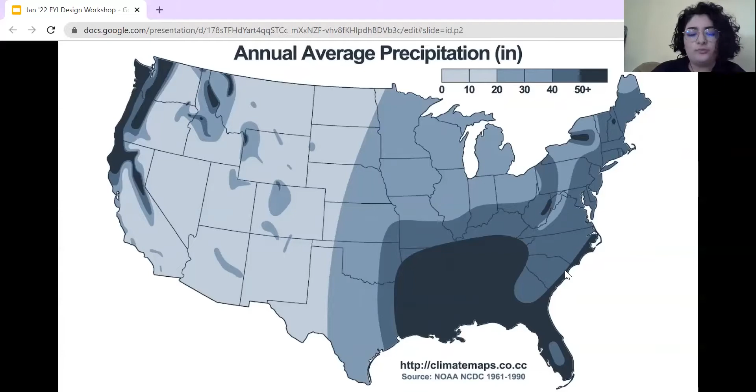So despite having a heavy yearly rainfall, we don't actually have that many more rainy days than the country's average. And that's because when it rains here, it pours. This quick deluge of water can and does quickly overwhelm our drainage system. It's the difference between dumping a whole bucket of water down the drain and trickling in a cup at a time.

Most of New Orleans used to actually be above sea level. That's because early New Orleans was only situated on the higher land near the river, created from seasonal flooding, which deposited sediment and created new land. As technology advanced, people were able to pump out water and make what was once marshland suitable for permanent structures. This has several unfortunate consequences, one being an increase in subsidence.

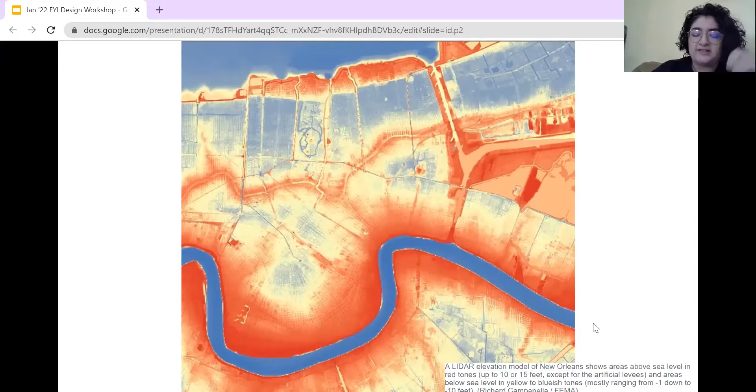So subsidence is just a word that means the sinking of land. Many of you are probably overly familiar with this concept. Subsidence leads to foundation shifting, sinking for homes, potholes that appear overnight, and yes, more flooding. New Orleans is particularly susceptible to subsidence due to the high levels of what we call shrink swell soils, such as clay. So when these soils dry out, they become like a desiccated sponge, and they can't be revived to their original volume.

The excessive amount of impermeable surfaces is creating more runoff, and that's runoff that our drainage system just can't handle. The Sewerage and Water Board's website says that an intense rainstorm that drops more than an inch of water in an hour will most likely outpace the system's capability. But we all know that a rainstorm that only drops an inch of rain in an hour is not very intense or very uncommon in New Orleans. Despite this, we have an excessive amount of impermeable surfaces that are creating 36 times more runoff than green spaces.

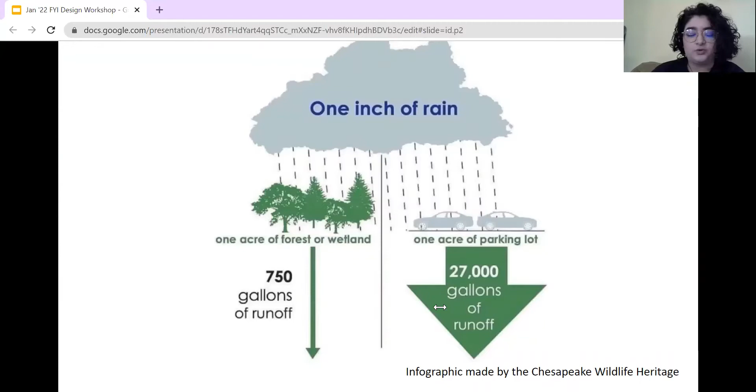Finally, we are overly reliant on that inadequate and antiquated gray infrastructure. Gray infrastructure refers to any traditional form of water management. These are things such as levees, floodgates, and pumping systems or basins. At the city level, we've heavily relied on a single approach to water management. Every drop that falls must be pumped out.

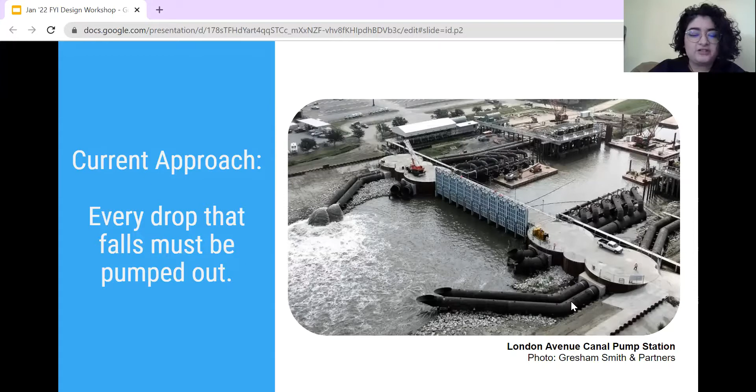This approach is not only resource intensive, but is also a leading cause of subsidence in our region. So we end up at an even lower elevation than where we started. And now we have these great big concrete walls, yes, preventing seasonal flooding, but also preventing new soil being introduced to our quickly depleting lands.

There's actually no equivalent to this map for drainage pipes, which is in itself a problem. But anecdotally, we do know that all the city's drainage pipes leave a lot to be desired. Pipes meant to convey runoff away from streets and homes are so degraded that they are often described as Swiss cheese when they're taken out, and so clogged that we're finding cars in them.

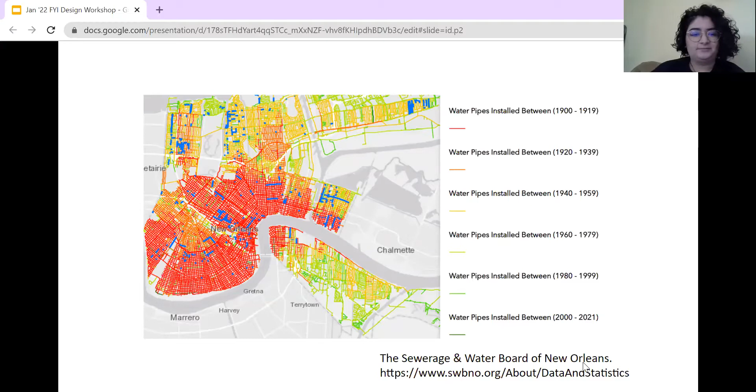So, as we've discussed, excessive impermeable surfaces can cause flooding and standing water issues. But are there other issues with concrete? Well, it's also ugly for one. Yards can be turned into parking lots. It's unsafe. Sidewalks end up getting blocked by cars, causing accessibility issues and forcing pedestrians into the street.

It's expensive. It creates more runoff, which your tax dollars have to pay to be pumped out. It's actually also a huge CO2 emitter. Cement contributes around 8% of the world's annual carbon emissions. And finally, it's illegal. The city defines excessive paving in the Comprehensive Zoning Ordinance, or the CZO, in most neighborhoods as over 40% of the front yard being covered in an impermeable surface.

And if you do pave illegally, the city of New Orleans might cite your property, meaning that there are consequences. You'll probably have to remove all that paving that you just paid to have laid down, and the city is not going to help you pay to do this. While far from an ideal situation, the city is beginning to recognize that paving removal is essential to New Orleans' resilience and is taking strides to require water management improvements on residential properties.

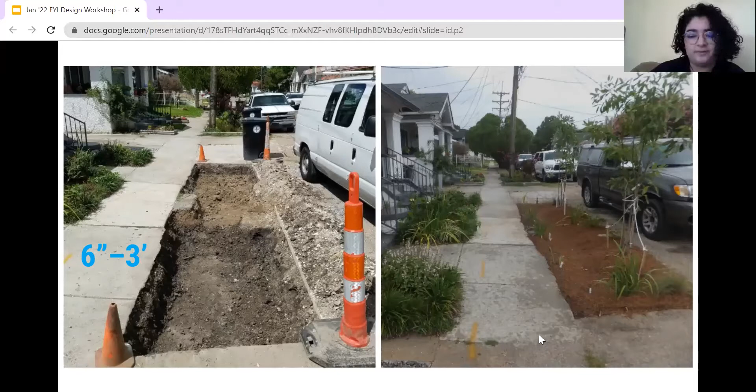When you fill the garden bed, you want to use a well-draining soil to encourage runoff to infiltrate. We recommend a mix of 80 to 90% sand, 10 to 20% topsoil, and 3 to 5% organic matter or compost. There are some local shops that sell rain garden soil-specific mixes, such as Schmelly's. Sand is made of large particles that create void space for water to seep into. The mostly clay soil that is super prevalent in New Orleans, on the other hand, is often so compacted that it can almost be as impermeable as concrete. It also isn't healthy enough to sustain the new environment you are trying to create.

The public right-of-way is the space between the sidewalk and the street. It is the city's property, but you can actually remove excess paving and install green infrastructure or a colorful garden like this one. It's a great example of how even tiny spaces can be transformed to greatly enhance your outdoor spaces and manage stormwater. Green infrastructure isn't just about stormwater management, but creating a more aesthetic, healthy environment for everyone to live in.

And just something to mention right here, because a lot of people do end up working in their right-of-way, is that as far as we are aware, you do not need a permit to work in your right-of-way. You do need a permit if you plan to do any work on your sidewalk, your driveway apron, or any curb cuts. Always talk to your contractor about whether or not they plan to get the correct permits, or if they expect you to get the correct permits. Because ultimately, you are responsible for getting the correct permits for your project. We are available to help with any questions with that.

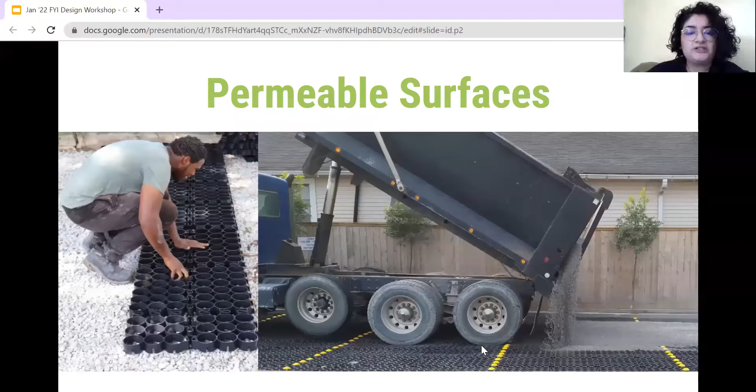Permeable surfaces can include permeable driveways, pathways, patios, or infiltration trenches, otherwise known as French drains. This creates storage space for stormwater to go and maintains a stable area suitable for light vehicular and pedestrian traffic. The pictured driveway can hold over 2,000 gallons of stormwater. This homeowner's first floor used to flood during a typical rain event, but now, even after 5 inches of rain, they are left with no standing water.

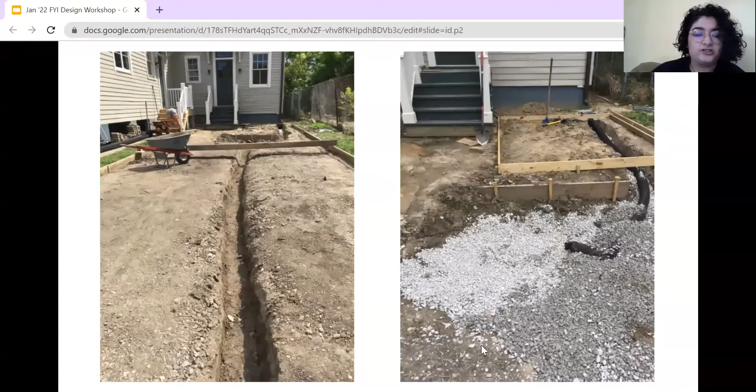Remember, most of what makes green infrastructure effective is what's going on beneath the surface. As you can see here, an area has been excavated with the middle dug even deeper for a perforated pipe to be placed. This creates more storage space for runoff and controls the conveyance of that runoff. The pipe is then covered with number 57 washed gravel, which is a very popular choice of aggregate, and this creates void space for water to be stored.

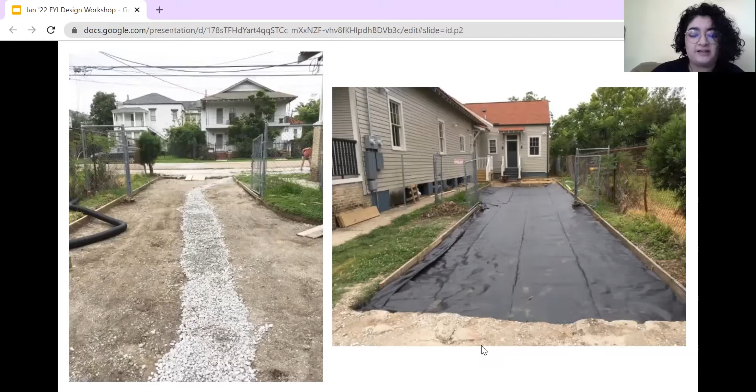Then the whole area is covered with a non-woven permeable filter fabric. This prevents debris from clogging the void space in order to maintain the installation's permeability over time. The finished product is a permeable driveway and a rain garden that holds an estimated 4,000 gallons of stormwater. You can even have permeable pathways within a garden. The gravel paths link water storage throughout. This is a good example of a mix of materials working together for compounding effects.

Okay, let's see if it plays. Dana, can you shake your head if it's playing? Awesome.

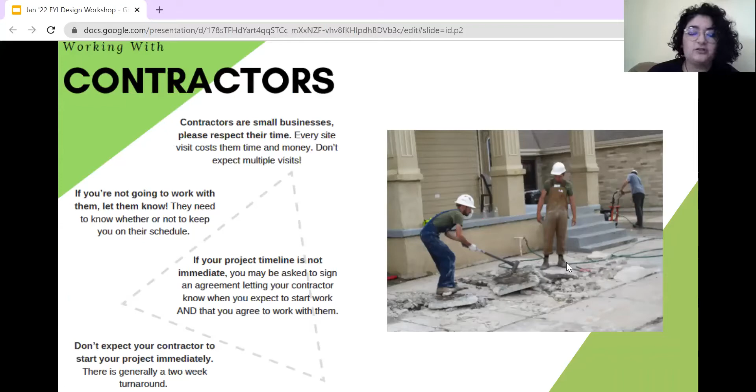You'll be working with very small local businesses most likely, so please be respectful of the contractor's time. Don't expect them to come out to your property more than once before you finalize a contract, and please understand that they have a lot of ongoing projects. A lot of supply chain issues from COVID and from Ida are still affecting a lot of these local small businesses, so please be patient with them. Let them know if you choose another contractor or if your timeline changes.

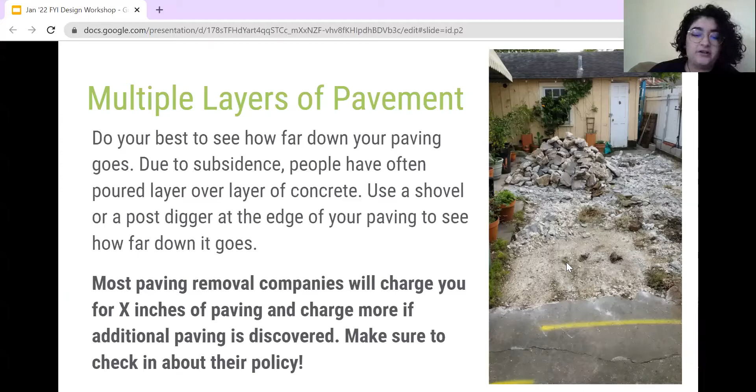So since concrete can be layered, do your best to see how far down your paving goes. Use a shovel or post digger at the edge of a paved area to see how far down it goes. Most paving removal companies will charge you for X inches of paving and charge more if additional paving is discovered. Make sure to check in about their policy.

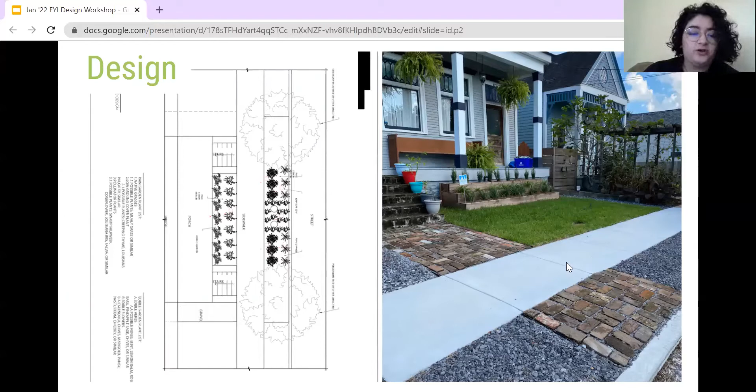So now we are going to review the next steps of the FYI process, design submissions. We're going to go over different features of designs that make them not only more competitive for the FYI program, but also more effective in combating flooding and standing water issues. In your workshop reminder email, you should have received graph paper to get you started on your design. As we'll see, there are many different ways to create your design that don't require graph paper. We do not expect professional grade design submissions. You can definitely do this.

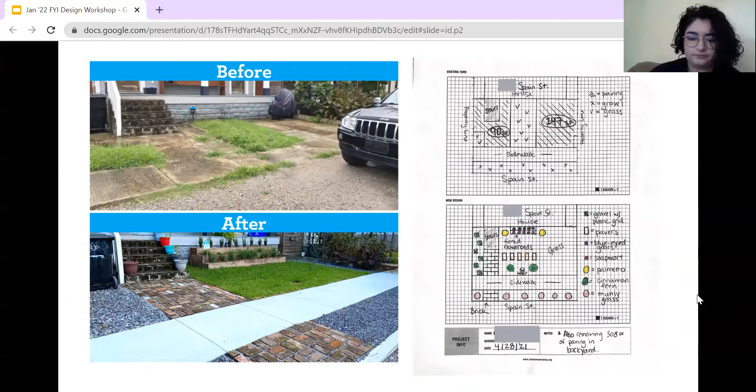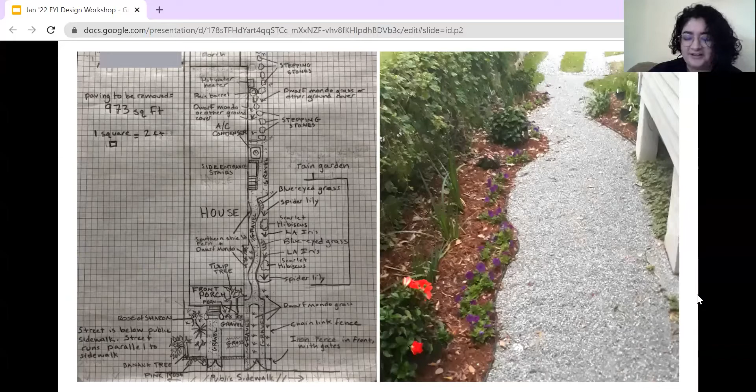This homeowner wasn't really big on drawing, so they instead just used labels. They labeled the sidewalk, fence, driveway, stairs, house porch, and the materials present in the right-of-way. We could not approve this design outright because it does not specify the types of plants to be used.

It's okay to be uncertain of the exact plants you plan to use, and we expect some small aspects of your design to change as you move on to the installation process. But specifying some plants in your design lets us know that you have given serious consideration to your project and expect to use a majority native plants. This homeowner was ultimately approved after informing us she planned to hire a local native plant specialist to landscape her yard.

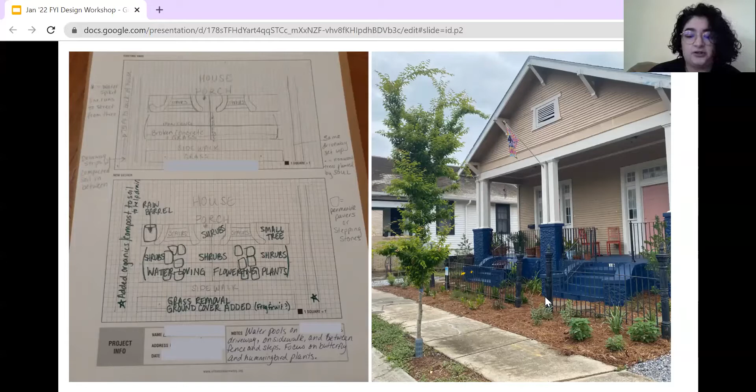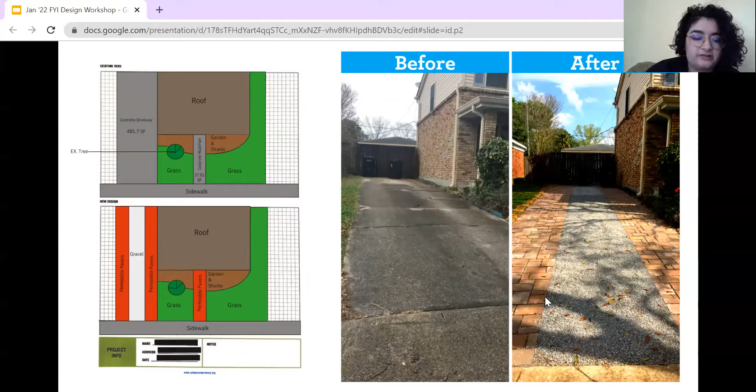So this is a good example of design that was ultimately accepted, but also required clarification from the homeowner. Since the design relies heavily on a permeable surface and there are no plans for other forms of green infrastructure, such as rain barrels or native plants, we asked the homeowner to specify the depth of the driveway. They planned for a 7-inch depth, which is great. We usually only recommend a 4 to 6-inch depth. If your design is going to heavily focus on only one type of green infrastructure, such as a permeable driveway, be sure to include details such as depth and materials.

So feel free to get creative with it and do what works for you. We receive designs that vary greatly in complexity and artistic skill. This is not what we are judging your design on. As long as we understand your vision and it aligns with our goals: visibility, inspiration, on-site water capture, and pavement removal, then you have a competitive design.

Remember, designs will be due in 2 weeks on Monday, February 7th, and you will hear back from us the following Monday, February 14th. You will receive an email this Monday inviting you to submit your design and with other details. Now let's take a look at some past FYI projects to get y'all inspired and revved up to make your own green designs.

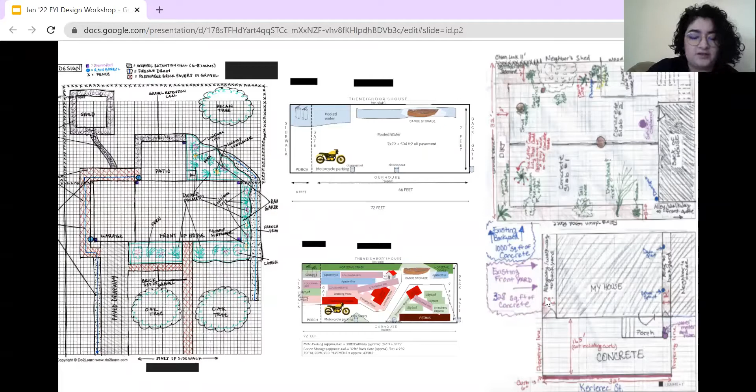These homeowners replaced their concrete with permeable surfaces and raised garden beds, and lots of native plants.

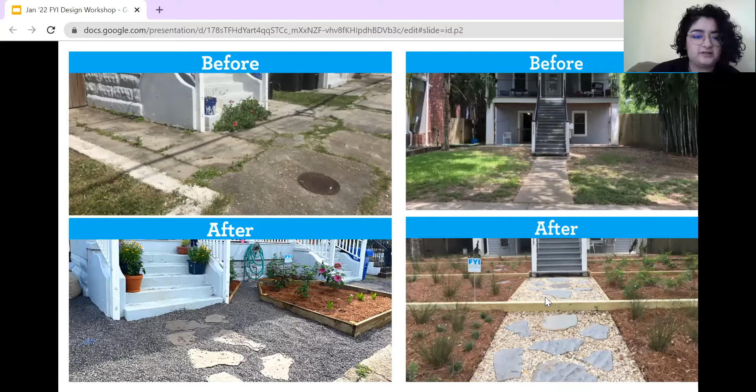When measuring out your concrete, you do not have to include your sidewalk if you plan to leave it alone. We understand a lot of homeowners don't want to touch the sidewalk because the permitting process can be difficult.

I hope some of these projects caught your interest and inspired you. Let's review the difference between a block that relies solely on gray infrastructure and a block that integrates green infrastructure. This is an unhealthy block. Rain falls, hits paved impermeable surfaces, runs into the street, and often overwhelms the drainage system, causing flooding. This does not allow for the water table to be naturally recharged and causes subsidence.

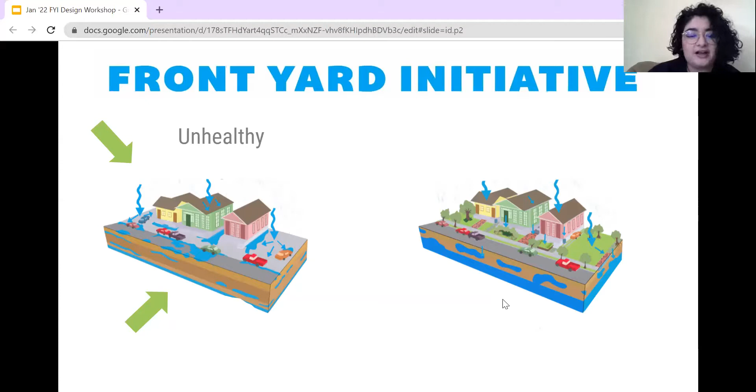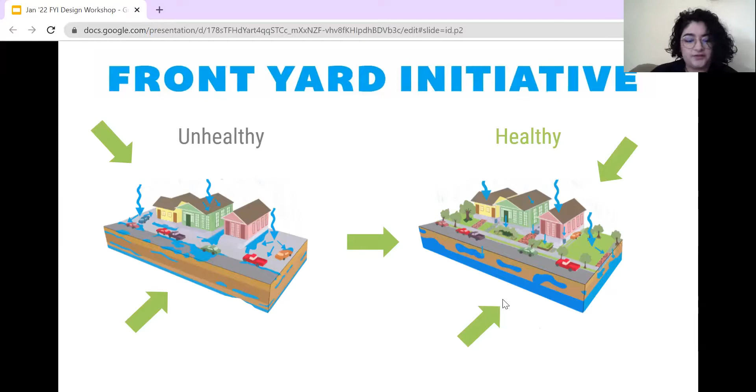In contrast, this is a healthy block. What you see here is a lot of green space, native trees and plants, cars are parked on the street instead of their yards and sidewalks, and there is overall less impermeable surfaces. A healthy block handles water on site. Rain falls, and instead of being pumped out, it soaks into the soil. This reduces flood risk and recharges the water table, slowing subsidence and keeping our soils stable.

So let's review the next steps of the FYI program one more time. You're going to observe your property during and after a rain event. Look for signs of pooling water; washout stains and moss growth are all signs of standing water. These areas will be the lowest areas in your yard and will help guide you in your design. Determine your yard square footage by measuring the length and the width of your yard and multiplying those two measurements with one another. Review all the FYI materials given to you before this workshop.

We will be sending you a follow-up email shortly with a recording of this workshop for your review, attachments, links to other helpful resources, and an invitation to submit your design. You'll probably get that on Monday or Tuesday of next week. Start your design. Draw how your yard currently looks for your before design and how you envision it to look in your after design. I highly recommend you review our FYI design requirements page on our website. That has all the design checklists that we went over earlier. Designs that do not include all the required elements will not be accepted.

Then finally, submit your design. You will have 2 weeks to submit your design. That means all designs are due by the end of the day, Monday, February 7th. We'll review all the designs within a week after the due date. You will be notified by Monday, February 14th, whether your design has been accepted or if we have suggested revisions.